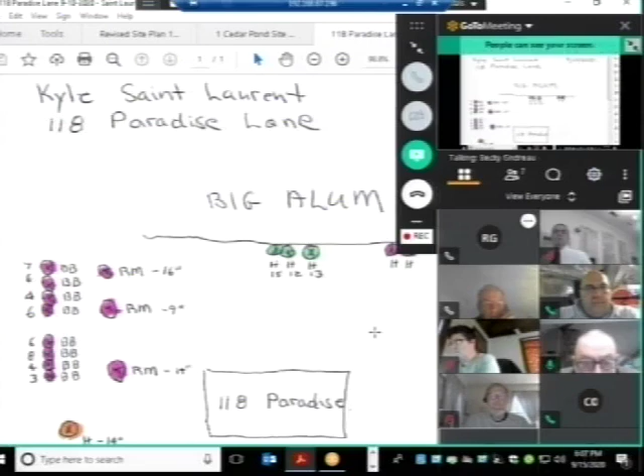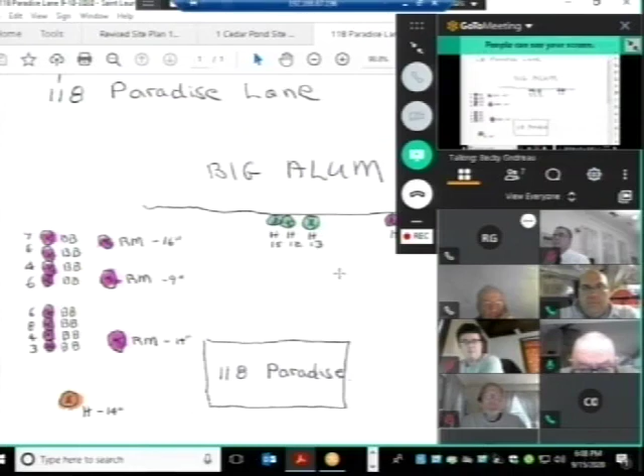All right, so here's the sketch that was drawn up. Purple indicates removal, and the green here is for staying. Let me just scroll down because I can't see it on mine. And the pinkish color is a hemlock staying. The only thing he forgot to include on here — that's actually 13 trees — is if you can see where my cursor is, there were 2 dead trees, I believe they might have been oaks, I'm not sure, in the front of the house that he just forgot to include, so the property owner asked those be included on here.

So I have no concerns based off of our review of the condition of those on the site, and with the arborist assessment. I'd recommend the approval of the removal of the 15 trees, and the treating of the 3 hemlocks by the shore. They also did include replacements, 2 river birch by the shore for the 2 removed by the shore. That's all.

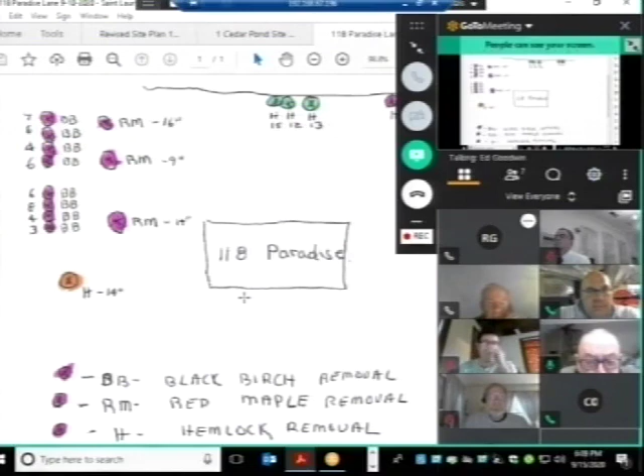Okay. Discussion. Eric? No, I was on site. As long as they're keeping those hemlocks, are those the only 2 plantings that they're putting in, Becky? Just the 2 river birches? By the lake shore, correct. Yeah, okay.

I have 2 questions. Go ahead. My first question: are the 2 river birches going to be one root ball with 2 river birches in it, or are they going to be 2 separate river birches? I don't recollect that it's specified.

We never suggest — I think we should make them 2 clumps, David. Well, that is 2 clumps of river birch. My typical feeling has been that one individual river birch does not do nearly as well as a pair because of their spindly nature as they get older. So oftentimes, like the ones in my yard, they had to be tied together in order to give them enough strength to continue growing.

My second question is, why is there such a disparity between the number of cuttings and the number of plantings? I don't understand agreeing to take down well over a dozen trees, not having any of those replaced. Let me see if I can give you an answer.

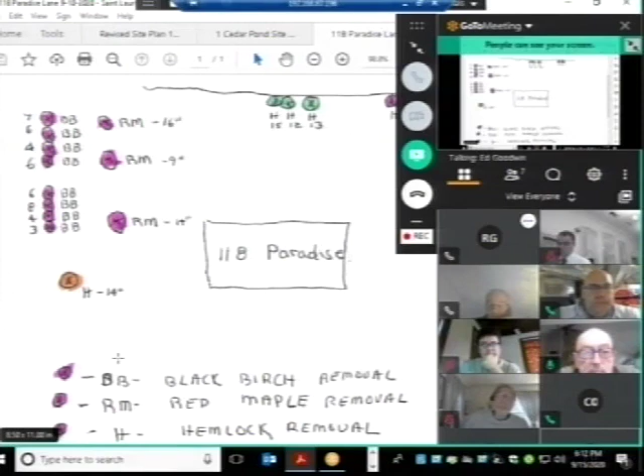It's not like — so the issue that they were bringing to our attention was along the house, as you face the water, to the left. There were a number of trees that were, I don't know what state you want to call them in, hanging over the neighbor's house. Most of them were in the 8 to 12 inch diameter range, and they were asking that they take those out because one had already gone down on the porch of the neighbor, and they all looked like they were going to be a problem going forward.

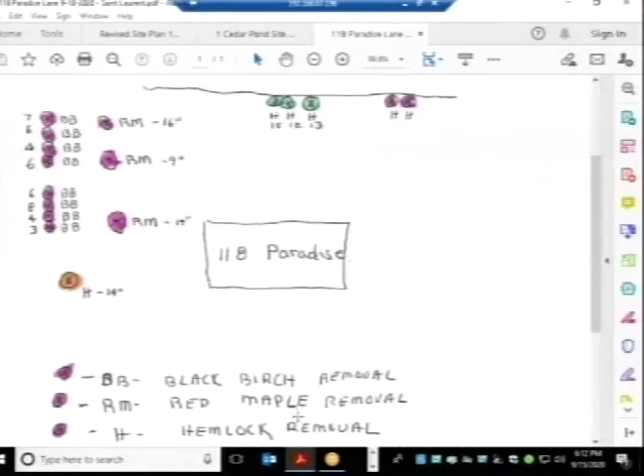So there were other trees there. They weren't cleaning the trees out, I felt, and to the front left of the property along the lake, we had asked them to leave a complete berm, and that's not on your diagram, but that berm of trees and bushes, etc., was untouched. So I don't know, Steve, you want to give them a measure of it? You were there.

Yeah, I mean, you're right, Dave. When you take a look at it on the surface, it does appear that we're not doing enough plantings. I mean, they were amenable to do anything that we asked.

I think what's been described is the way I saw it. Also, like I say, they said they would do anything that we asked. A lot of those trees weren't necessarily ones that looked like they needed to come down or were going to fall on somebody's house. I don't know, I thought the plan was fine.

Eric, you were there, what do you think? Yeah, it wasn't like they were clear cutting all the trees out of there. The only concern I would have is any precedent it might set, or people coming back at us, but I don't know that really comes into play in this case. It's not going to hurt the canopy for the lake, where we're talking about them being cut. They are leaning towards the other person's property, and they were very amenable to saving the hemlocks right near the resource area. So, I don't have a personal problem with it as it stands, overall.

Is Lenny on board? Yes, I'm on board. Hi Lenny. Anthony, how you doing? Good evening. Good evening to you too.

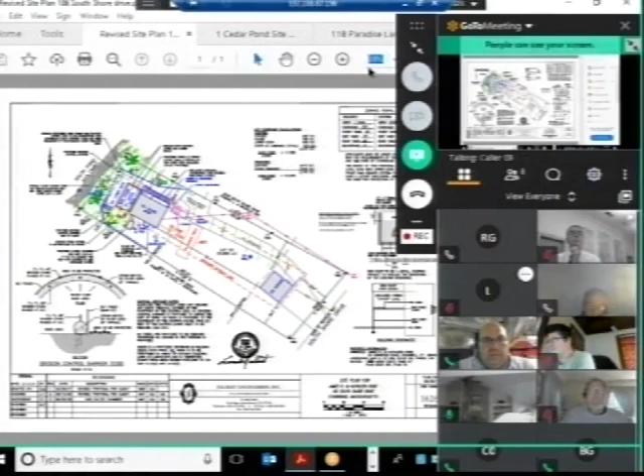What this actually is, it's work that's only taken place on the westerly portion of the cottage itself. The actual deck that's on the property presently is only 21.7 feet from the water to the deck itself. What we're actually doing is we're taking off roughly 9 foot of the deck, which is on the most westerly side, and leaving that as open space. And the new deck we're putting on is a 16 by 28, which is a two-story deck - the upper deck would be 16 by 28, and the lower deck is actually 16 by 20. It would have a membrane roof on the lower deck, which would be running off and draining to a Cultec located on the southerly side of the house, adjacent to the property line on that side.

The work being done on the deck itself is that the whole deck will be completely removed and rebuilt - it needs repair. Also the stairwell, located on the southerly side of the deck, immediately adjacent to it, that stairwell and the stairs would be replaced with new lumber in that area, but the rest of the stairs leading from there to the water would not be touched nor replaced. It would stay as is. It'd be fine.

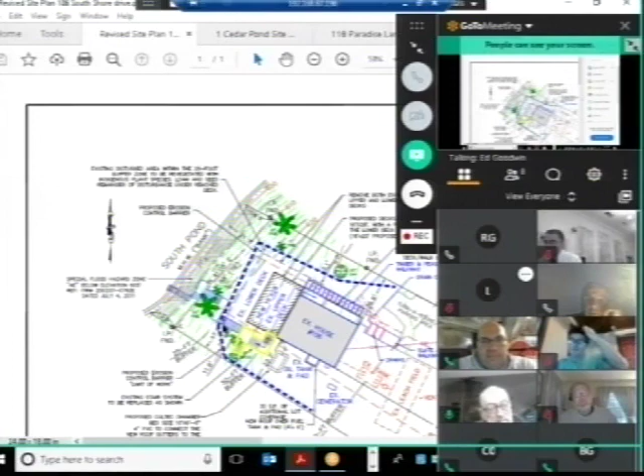I have a concern. When, as a committee, we're quick to allow a deck, and then we're going to go deck to house, or a screened-in porch and then a house. I mean, that's a functional way of... Then they're going to come back next year and ask you if they could put a deck off the front. This is a hyperbole, I realize, but I think it's something that the committee has to be aware of as you move forward.

By the way, for members of the committee that haven't been on that long, what you should now recognize is that was our chairperson speaking in his normal cynical way. That's not cynical, that's experience.

We've seen that. Well, if I may, Mr. Chairman, our issues generally of that process have to do with impervious surface and water runoff, and that's essentially reduced.

Has it? I didn't see the site. So that this deck...

Was not impervious. You're saying that the deck that exists today was not impervious? No, it's got spaces between the boards. So it's a pervious surface, and you're going to have a 28 by whatever impervious section with a roof on it. How's that an improvement?

I think Lenny clarified for me in the office when we spoke about this, and maybe you can clarify that too, Lenny. You're saying that there's no roof structure going over the upper deck, it's just a membrane that goes underneath the deck, and that's what will drain to the Cultec unit. Is that correct?

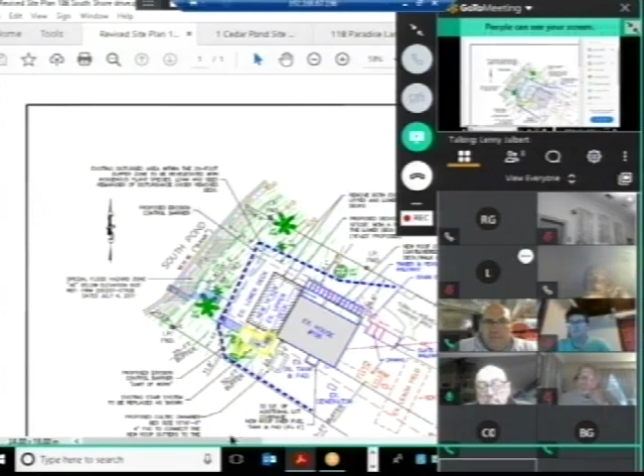The runoff on that roof is exempt from the Wetlands Protection Act in that it does not create any hardship or pollutants relative to runoff, and I think it's a win-win situation.

Just looking at the plan to clarify, the roof—if you can see where my cursor is—the new roof overhang will go over the walkway on the side of the house, if you can see that. That one, yeah, that's just a shed roof for the walkway, that's all it is. It's going right back into the area.

I think that's where the confusion of the roof came in, is right, what I was trying to get at.

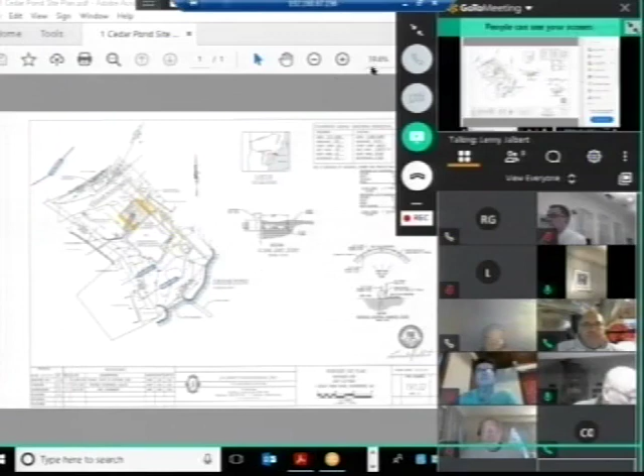Lenny, you're on. Yes, good evening again. We're on to the property located at 1 Cedar Pond Road. Basically, what is actually going to take place there is putting on a 24 by 24 foot attached garage, which is located westward from the lake and is actually buffered from the existing structure that's there now.

In the process of doing this, what we actually have is there's a shed located on the portion of the site, which is on the side of Cedar Pond Road. That trailer. Yeah, but we have an interference problem.

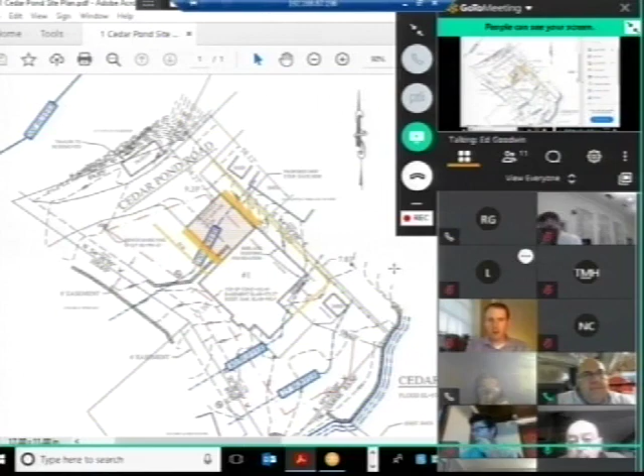Public comment. Do we have public? Jeff? Good evening. Does anyone want to speak to the application for 1 Cedar Pond Road? No public comment.

All right, do I have a motion to close the public hearing? Steve Halterman: Yeah, I move to close the public hearing. Eric Gaspar seconds. I'm sorry, Steve, no, I'll second it. Hey, next time.

Do I have a second? I'll second it. Steve Halterman seconds.

All right, discussion? All in favor of closing the public hearing? I'll start with Eric because he feels it's slighted. Go ahead, Eric. Eric Gaspar in favor.

Stephen Chidester in favor. David Barnacle in favor. Steve Halterman in favor. And Ed Goodwin in favor. Do I have a motion?

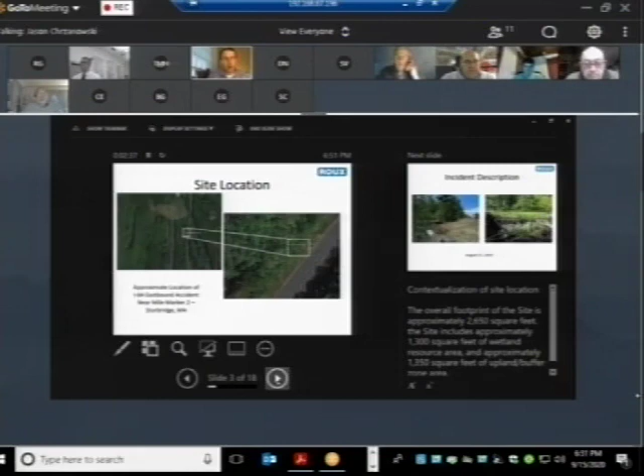So just walk through here. I think we've covered some of the incident locations near mile marker 2 on 84 eastbound.

This photo is from the day of the accident. You can see the excavator down in the wetlands. Tricky access to get in there for sure.

Some of the conditions - this is the wetland area where the truck went, and this area down here is where we've been working. It was mostly muck and wetland material, which we pulled out, and then we started working up slope. We're now more focused on this area up on the slope, just to finish some of our cleanup work and then restore the resource area.

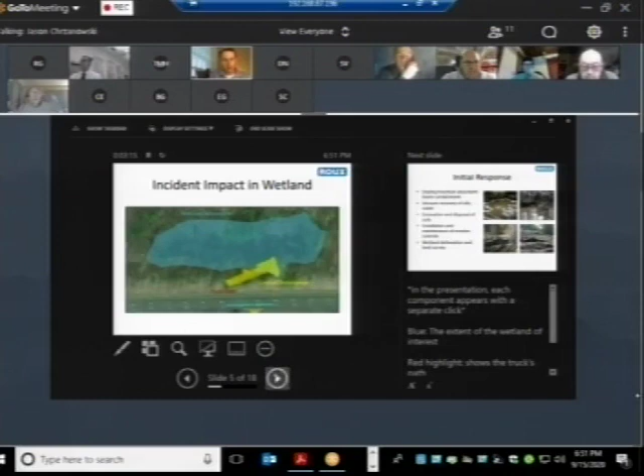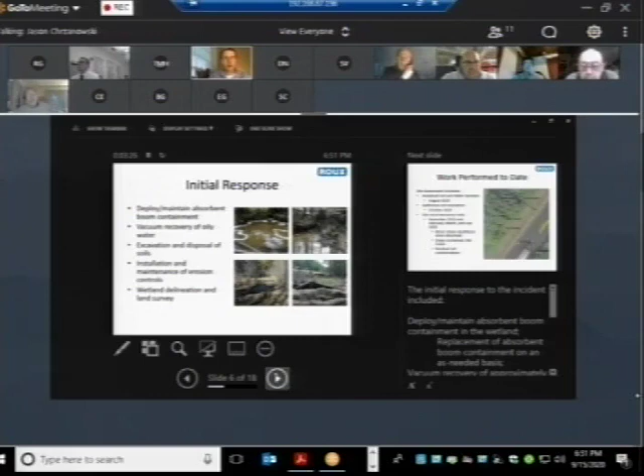Here's some of the boom containment from the day of the incident, which we've changed and maintained over time. We set up erosion control - silt fence, hay bales, things like that.

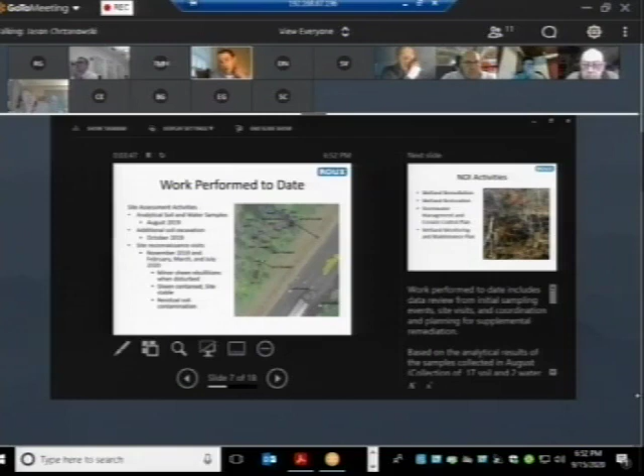This is some of our sampling and analysis. We've tested roughly 18 samples. A lot of them are clean. There's a couple right on the edge that we're going to focus our next round on, and we'll do more testing as we clean it up.

The NOI is basically to do additional cleanup. We'll do soil samplings to confirm we've reached our cleanup goals with Mass DEP, and then we'll stabilize the site.

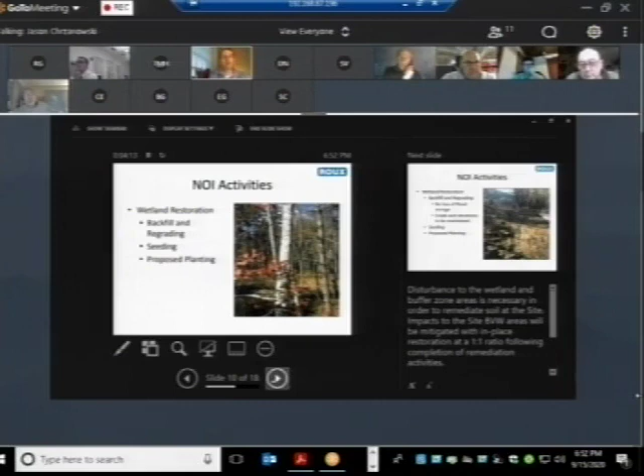Pending this hearing and the outcome, we'll look to start work pretty quickly. We'll probably stabilize the site this fall and be looking to do the plantings in the springtime. It is Mass DOT property, so we have to do an access agreement with them.

Application and permit - we don't expect too many hurdles with that. They just asked what the result is going to be when we put it back together. We've surveyed out here and we're going to restore the area and the grades to make it like it once was, so there shouldn't be any loss of flood control.

In the NOI application, we have a seeding and planting plan to put soil back in, and some native plants. We also have jute mats for erosion control to go in as well.

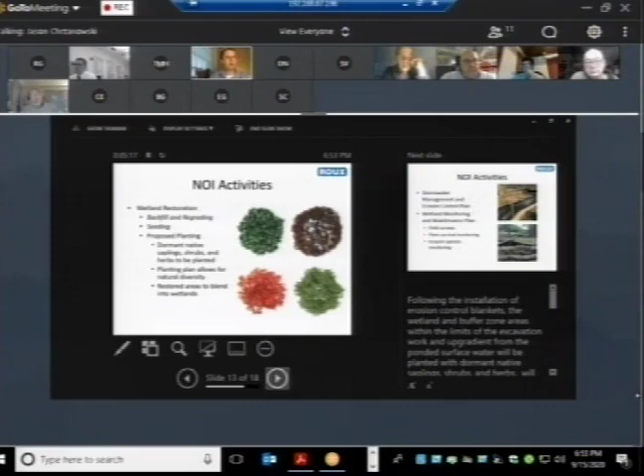The NOI itself details the types of trees - I'm not going to speak to the trees specifically, but we'll put them back in, and we'll maintain our erosion controls out here like we have.

This is our anticipated schedule - pending the hearing, we'll look to engage someone like Clean Harbors, most likely come out and do the work this fall, stabilize the site, then keep an eye on and monitor to make sure conditions are stable, and be looking in the spring to put it back together. This is our contact information should you need it.

So with that, if anybody has any specific questions you want to delve into, I'll open it up.

David asked: one question - what percentage, approximately, of the 100 tons of material you took away came from within the pond?

I would say probably at least 75%. When we arrived on site after the accident, Mass DEP was out there first. Clearly, they had to pull the wreckage out and start work. The excavator was already in there, and it wasn't entirely surface water - it was mostly muck, with some water right at the surface. As we started pulling that muck back, clearly it's a wetland, so the pond kind of formed. But I would say what we pulled out was probably roughly 75% of the tonnage right now. Thank you.

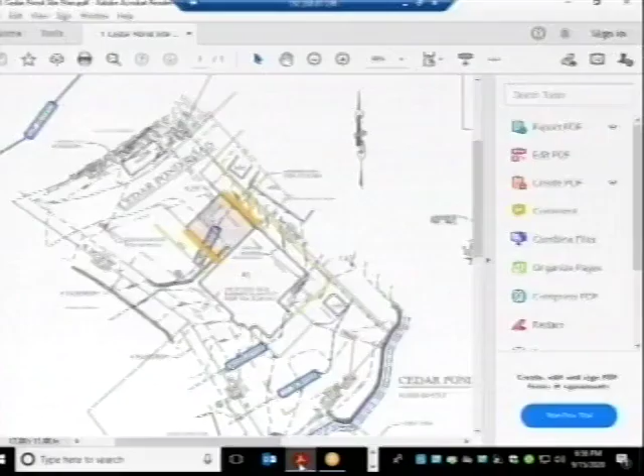There's some individual compounds specific to fuel that are just above threshold. One of the concentrations has a level of 4, and we're at about 4.4.

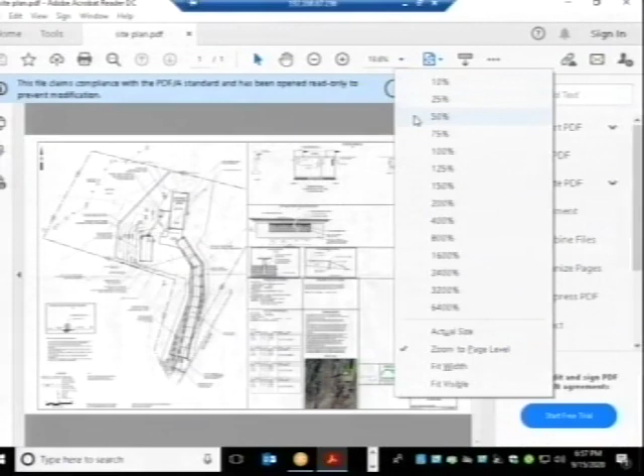In addition to the soil, there are also issues we have to address besides soil concentrations to make the case for a permanent solution with Mass DEP. Some of that has to do with stability.

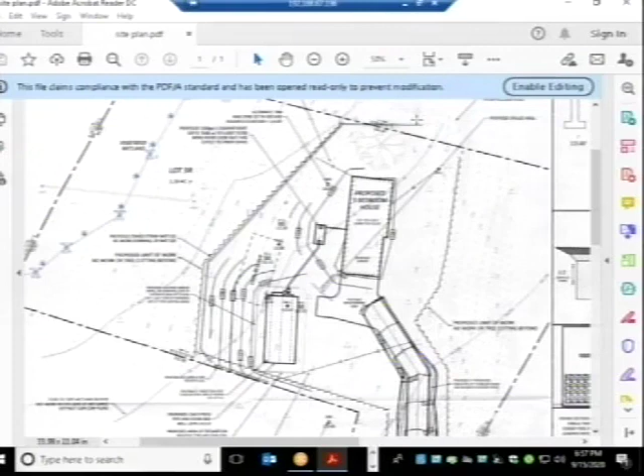When you have those levels, there's a little bit of odor, so we run a field meter on it. Even though the soil is testing not too egregious, it's a sensitive area, so we don't want any sheen showing up in the wetland after we restore it. That's why we've maintained the booms out there.

So there's a couple of goals—not only the soil concentration, but the longer term question of whether those trace levels, even if at or below a regulatory threshold, could generate a sheen. That's something we want to avoid after putting the wetland back together.

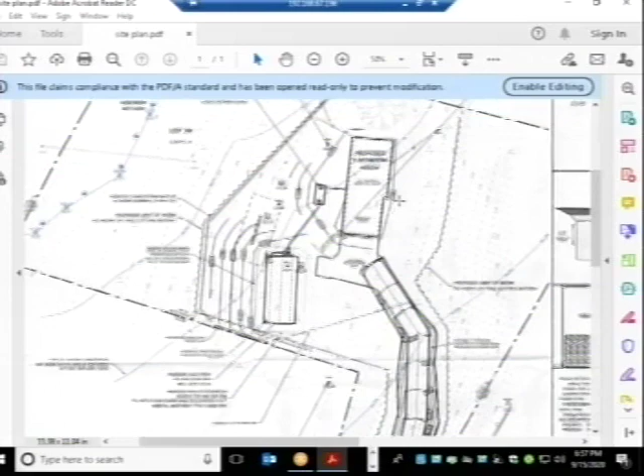The other aspect we're required to address in the MCP, per regulatory guidance, is we have to make an argument about whether it's feasible to achieve or approach background conditions—basically, what the site would be in the absence of our spill. Granted, it's the side of a highway with some roadway runoff, so it's not zero.

Given the wetland's accessibility, working on that slope coming uphill is a challenge, but in the scheme of things it's pretty feasible to do a little more work to make sure we're cleaning the site up to meet the standard of care in the MCP.

And your second question? Well, it has to do with timing. Yeah, that was one—it happened a year ago. You went in there with an emergency approval from us, and of course the state was already there.

I don't get why this thing is still going on. I mean, obviously you don't have to go to zero as far as concentrations, and I'm confused by this whole thing. I've done this kind of work myself, and I've never done anything quite like this. It's drawn out, and I'm not trying to be negative, but I don't get it. Could you walk me through why we're doing restoration a year after the event happened?

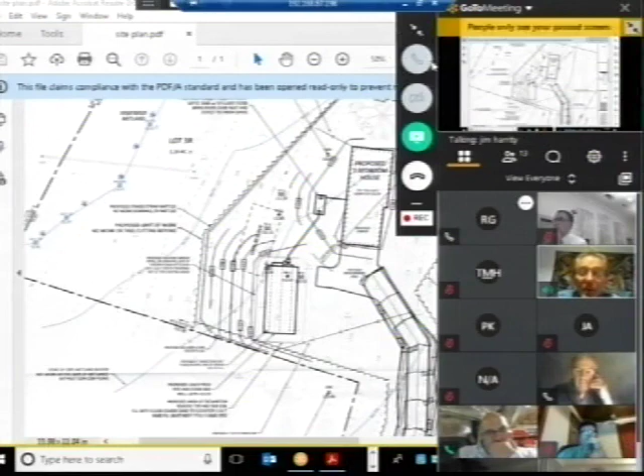So as you can see, it's a single family that's down the hill a little bit, and it's a 3-bedroom septic design located behind the house, and looks pretty straightforward. The only thing is...

Becky, do you want to talk about the stormwater requirements? Yeah, so this is the third lot that we're seeing from this property. We did review 2 previous ones, individual single-family houses last year. With this filing, we did see that there's 5 lots proposed here. So anything over a 4-lot subdivision does trigger the Massachusetts stormwater standards. There was some discussion about maybe doing 4 lots instead of 5. The property owner has considered that and he'd like to move forward with the 5. So they do need to submit the stormwater checklist and drainage analysis for this property, as well as discuss how to address the 2 properties that have been constructed at this point, but their permits aren't closed out too. So that's kind of outstanding at this time.

So Jim did want to come on to the meeting. When this came in, I did note that we didn't go out for a site visit at this time. It's my understanding they'll be working on addressing the stormwater for these properties. So if he's going to be asking, I was recommending a continuation to our next meeting. That would give them time to submit those materials, and then we can go out and do a site visit to this property too.

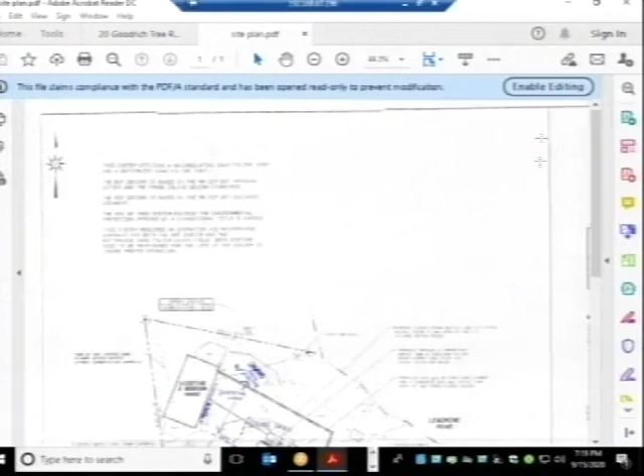Becky, you went out there. You want to? Yep, I'm just trying to pull up the site plan so I can give a general overview, and if there's anything, Tim and Mary, that you want to add, feel free to add in. So let me just share my screen. Okay, all right, so this is the site plan.

So this is a property on Lead Mine Pond, existing two-bedroom house here. There is an existing driveway which goes down a slope. We did do a site visit out here last Thursday. It is a paved driveway in pretty poor condition. Their goal is to repave the driveway. They will be adding a riprap swale along the side, which will help pick up anything coming off the hillside. And then they do have an existing parking area down here.

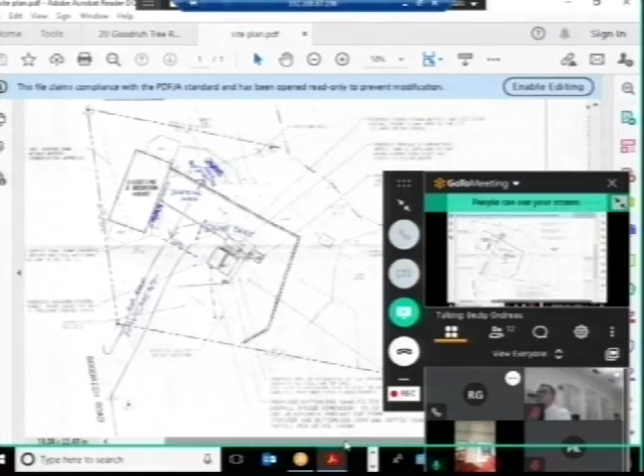And one of the other things too is just the tree removal that occurred on site. So the property owners - I'm just going to pull up the second plan, which has got the trees on it - did hire a contractor to come out and do some limbing and removal of a couple of either hemlock or pine trees on the property. The contractor informed the property owners that permits weren't required, so they thought they were all set. I did receive notification that work was occurring out there, so I stopped at the property, met with the contractor and the property owner at the time, and went over that. At that time, they were done with the limbing of the trees, and it was just removal of 3 smaller pine or hemlock trees.

I did talk to them about the requirements for it, and they're aware of that now. They immediately addressed my concerns and submitted the RDA and an after-the-fact tree removal, which we included as one application. When I was out there, I made a recommendation because there are a lot of trees in the area, and because of the canopy removals you typically look for some type of replacement.

There was one area where I thought some shrub plantings, right in this general area, would be a good addition to the property. They included the removal of the 3 hemlock trees noted here, and they are replacing and adding 4 high bush blueberries.

So with the driveway and the after-the-fact removal of the trees, I don't have any concerns. I'd definitely recommend including the replacements they've offered to do as a condition for that.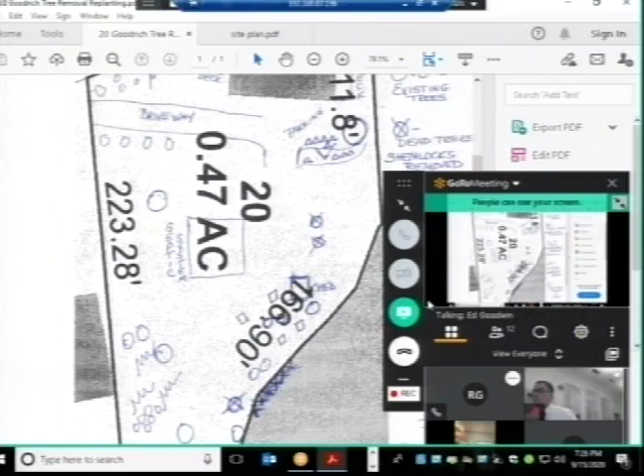Thank you, Jeff. Do I have a motion to close the public hearing? So moved, Steve Alderman. Second, Eric Gaspar. All right, discussion? Seeing none, all in favor?

Eric Gaspar, in favor. Stephen Chidester, in favor. David Barnacle, in favor. Steve Halderman, in favor. And Ed Goodwin, in favor. Closing the hearing. Okay, do I have a motion?

I'll make a motion that we approve the requested determination of applicability for 20 Goodrich, which includes the driveway repaving project and the already completed tree removal. Do I have a second?

Steve, you're not looking at your computer. I was pointing at you. Eric Gaspar, second. Okay, sorry, I missed that.

Discussion. I have a quick question about the erosion control - I know it's just going to take one day, but you might just, for safety's sake, ask that the contractor has some erosion control material, a wattle would do, on the site.

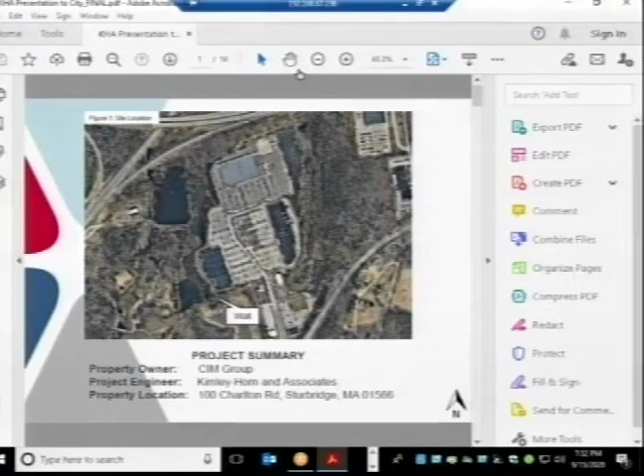No, Philip, you can't take one meeting and figure something like that out. Oh, fair. Okay. I can assure you there are times we're way off. Gotcha. Okay, well, that makes me feel better.

Yeah, we can go through these first. We repeated a lot of slides. We did add a little bit more additional information based on some comments and questions. So again, here's kind of the overview of the project location. Go ahead and move to the next one, Becky.

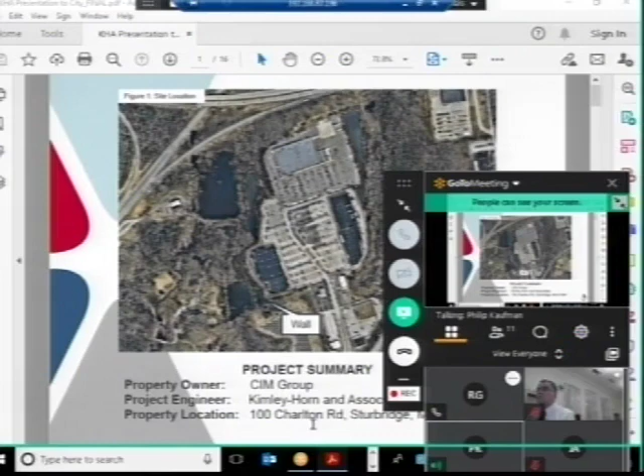Again, where the wall sits, just some of the spacing. I think we talked about this in detail last time, just how there is obviously a pretty limited buffer from the existing wall to the wetlands. Go ahead.

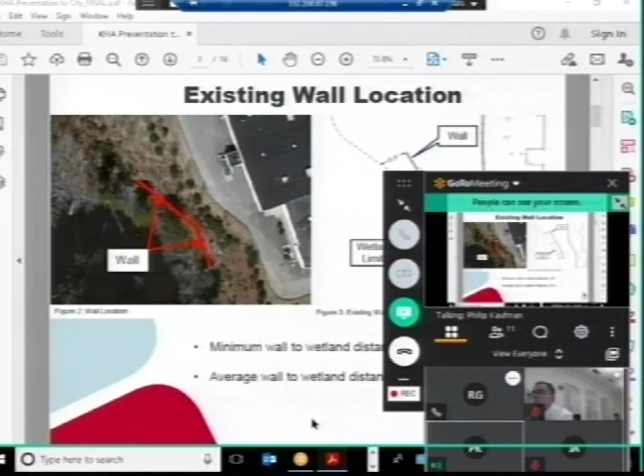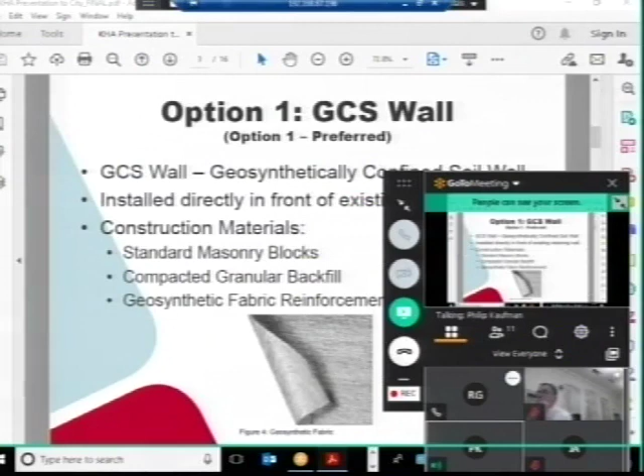The option that we presented last time, which remains our preferred option, is the geosynthetically confined soil wall. You can skip ahead to the next slide. This is, of course, not changed.

What we found was that even after our proposed wall, which would be 10 feet in front of the existing wall, we would have a minimum of - these numbers are a little bit misleading because we're adding 5 feet for construction activities. So there would be 8 feet from the new wall to the wetland.

During construction, we estimate we would be 5 feet. So you'll see the first bullet, the minimum space during construction would be 3 feet, and that would be at the absolute pinch point. The average would be 8.5 feet during construction, and after construction it would be 5 feet greater, at 13.5 feet from the new location of the face of the wall to the wetland that was delineated by our biologist just a couple weeks ago.

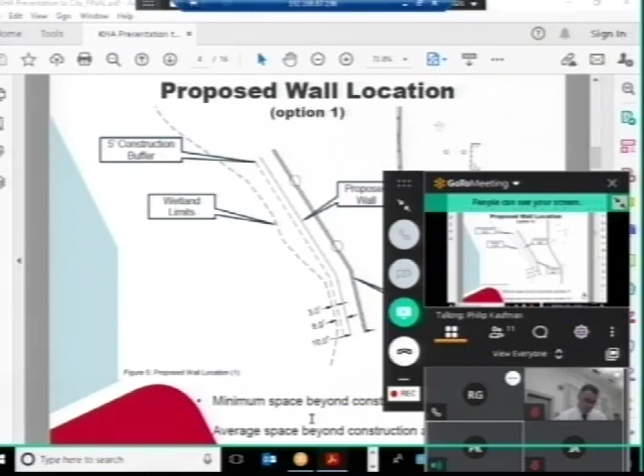So you want to skip ahead to the next one? So again, we showed you this last week, but we would be putting this wall 10 feet in front of the existing wall, and we'd be filling in with backfill the space in between. So that's the design concept here, if you want to skip ahead, Becky.

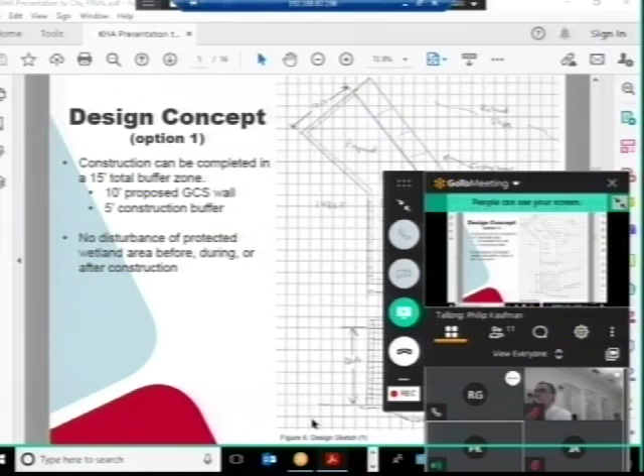So one of the questions that came up last meeting was specifically about clearing and kind of what we thought that might look like for this option and the alternate option we have here. One of the major advantages is that the construction is really confined much to the space. And I know we showed you photos - we'll look at that again here in just a minute from two weeks ago.

But we're working on the top end of the new wall, so most of the actual construction activities are in the 10 feet between the existing wall and the new wall. So really the area that we need for construction activities would be the 10 feet for the new wall and about 5 feet beyond that, so a total of 15 feet. We would need to clear all the way from the gravel private road, and we would clear a path that gets us down to the bottom of the wall.

So here's our estimate. We went 5 feet beyond the back. If you look at the very top, we have a little dimension that says 5 feet. But we think the total clearing is about 521 square yards of space. If you go ahead, Becky.

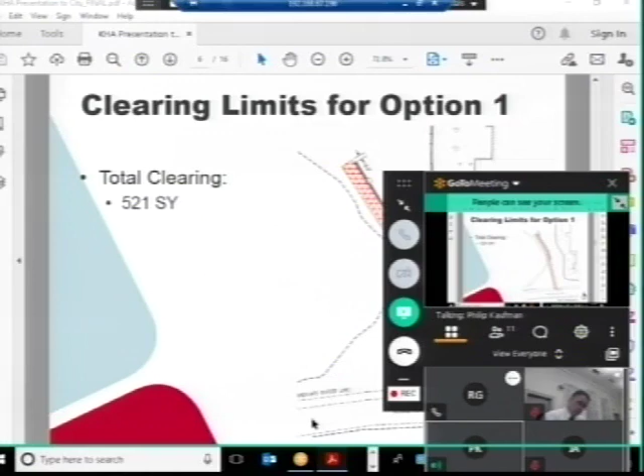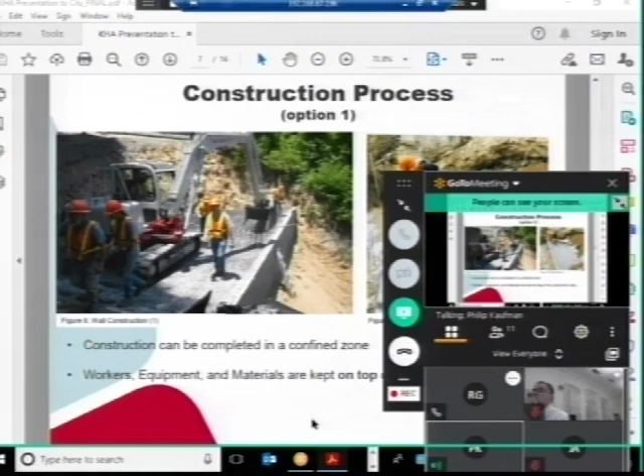And then here are the photos in the next slide that, again, just kind of show you some real photos of the action, right, of an install, where you can see the construction equipment and all of the construction really happening in that confined space between the two walls. So as soon as that wall starts getting built, we're trying to minimize - there shouldn't be any more than just a couple feet of impact from the new wall location to the wetlands. Once we get going, most of the activities happen within that 10 feet between and not on the wetland side of the new wall. Skip ahead.

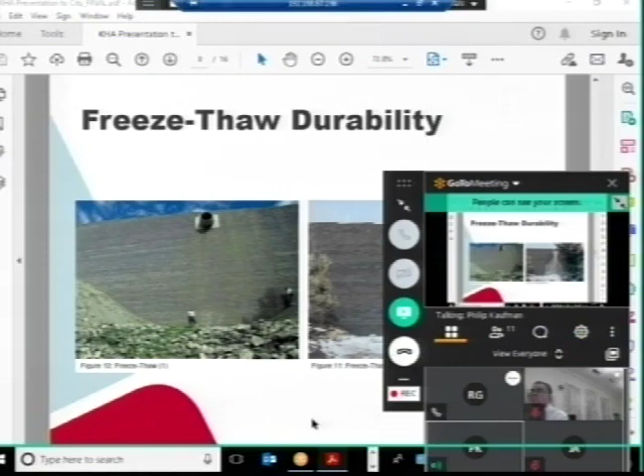I'm going to let Justin talk about the next two slides, again as it relates to some of the questions that we wanted to try to address from two weeks ago on the freeze-thaw, and then the next slide about the water kind of surrounding as the wetlands potentially move or expand moving forward. Justin, do you want to take over for these two?

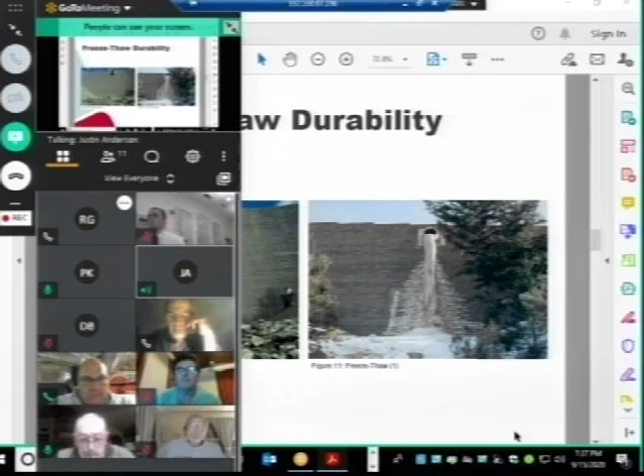The figure 10 on the left is really intended to show the height to which these walls can be constructed. You can see our founder there in the bottom for scale. And then I think the question was raised last week about the durability of the blocks to freeze thaw, so we presented the same photo on the right in the winter to visually demonstrate the repeated freeze-thaw cycles that they can endure.

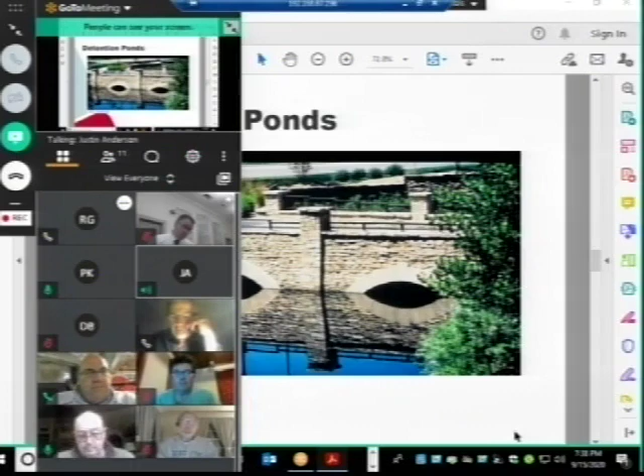Justin, your wife got you taking care of the kids tonight, or what's the story there? Yeah, I don't know what's happening in there, but it's... okay, I'm just kidding.

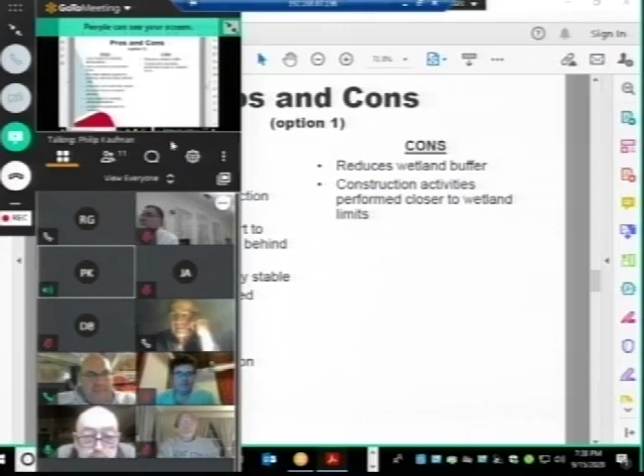Great, thank you, Justin. So here's kind of the pros and cons as we see for the wall here. It's less impact to landscaping - that will make more sense when we show you the second option, but the impact is really just a 15-foot trail from the existing gravel trail through to the wall and across the face of the existing wall. More confined construction zone, as those photos showed, compared to option 2. It provides lateral support to the existing wall and the slope behind it, so that new wall is taking all of the pressure and support of everything behind it - internally and externally stable.

I do want to apologize - afterwards Becky and I had some emails back and forth with Mark, the owner, and I think I confused everybody on how I used the term failure. I want to clarify, and we shared the report that Kimley-Horn prepared in 2017. We believe there are localized failures only, not a global stability issue or any major structural wall concerns. What we believe has been happening is very localized failures where the soil or gravel underneath these large rocks has been washed away with time, and the top layer of rocks has less resistance as the sand and soil underneath wash away, so those rocks have been sliding and falling off the top. I apologize, I think I was unintentionally confusing on the last call, but we believe there are only very localized failures.

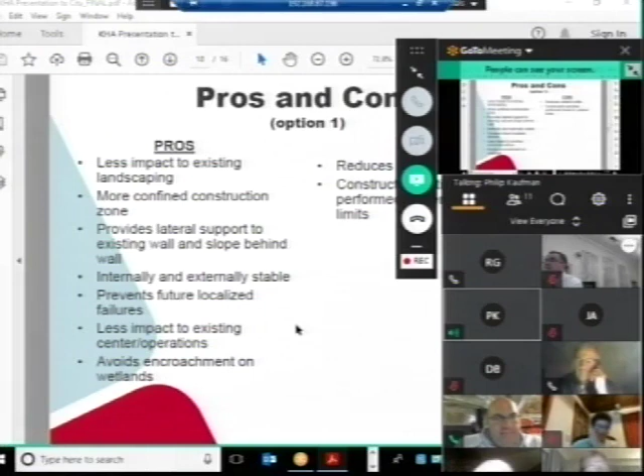Okay, so let's jump to the next one and talk about option 2, which is our soil nail wall. This is where we're actually going to be doing a series of walls where we eliminate the top half of the existing wall and grade back. Let's jump to the next one here.

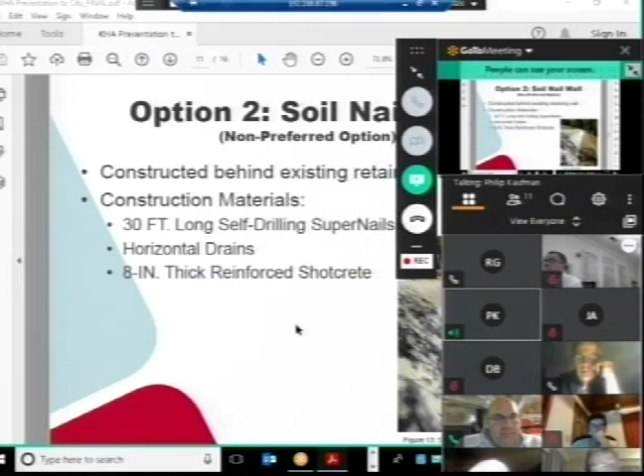This is tough to see in this 2D plan view, but essentially where the existing wall exists today, we're going to eliminate the top half of that wall, and grade back, and basically put a second wall up where you see the proposed wall, which is going to be much closer to the center itself. If you skip ahead to the sketch, I think it will help.

Here's the sketch where on the left you can see the hand sketch where we point to the existing wall. We're removing the top portion and grading back at 2.5 to 1. Then where you see it start getting more vertical, the proposed wall, that's going to be concrete, essentially shotcrete, vertical. I think we've got some photos.

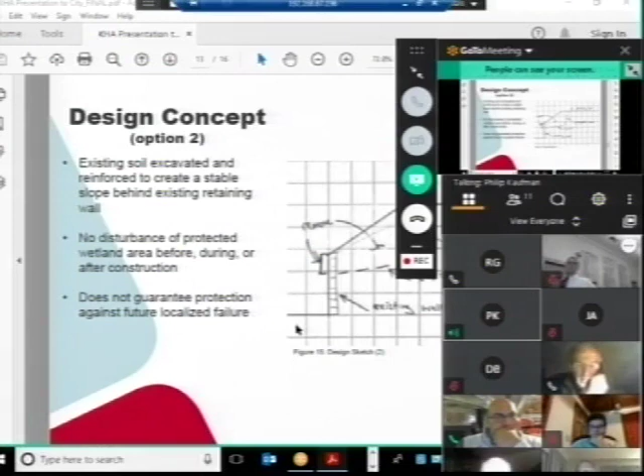There was a good one on the cover sheet for option 2. We're going to install a new wall, so it will essentially be a series of walls much closer to the parking lot. This is kind of the design concept for option 2.

So the clearing for this one, it's a little bit unfortunate that in order for us to do so, we're going to be doing 2 things. We're going to be installing the new series of walls, and to do so, all of the clearing is going to have to happen on the top end of the wall. That's the big chunk of crosshatch at the top end.

The reason why we continue that 15-foot stretch on the bottom is because a couple of the blocks have fallen, which led to the discussions today. We talked to GSI about whether there's any way we can mobilize equipment on the top end of the wall and reach over to pick up those blocks. But in order for us to truly get those out of there, we're going to still have to get equipment down to the bottom of the wall. So we're kind of double counting that 15 foot. That is still going to need to be cleared, same as option 1 and option 2.

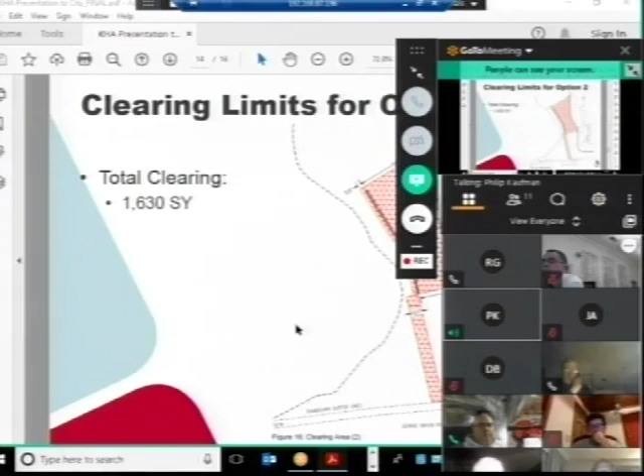But option 2 also has all of the clearing on the top end. So as opposed to the 500 some in option 1, we've got 1,600 square yards in option 2. Go ahead, Becky.

So here are some photos. If you look at the top right, figure 19, that one does a good job. I think you can kind of see that shotcrete, that edge where that wall is going to be a concrete edge.

The bottom left kind of shows them blowing in and installing the shotcrete in that wall construction. But what I also like about maybe the top left and the bottom right is that the majority, or a lot more, of the work is going to be able to be done on the top end.

So what's going to happen is we're going to start at the top, actually utilizing the center and the pavement, the rear service drive for the tenants. And we're going to have the equipment with the excavator, with the arm reaching over and starting to excavate.

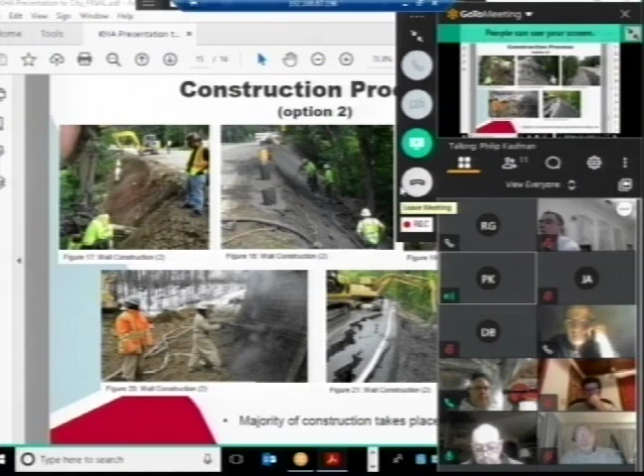Now, as we excavate, we're going to end up having to create a road or path, and we're going to have to bench. So all of the construction is not going to be able to be done at the top. We're going to have to utilize that space that will be between the two walls. But the point is, all of the construction will be on the top end of the existing wall.

And so that space in between, which is landscaping today, where we are clearing, will be basically creating paths and benching level areas for the equipment to sit as we excavate out for the new wall series. Next slide here, we're about done.

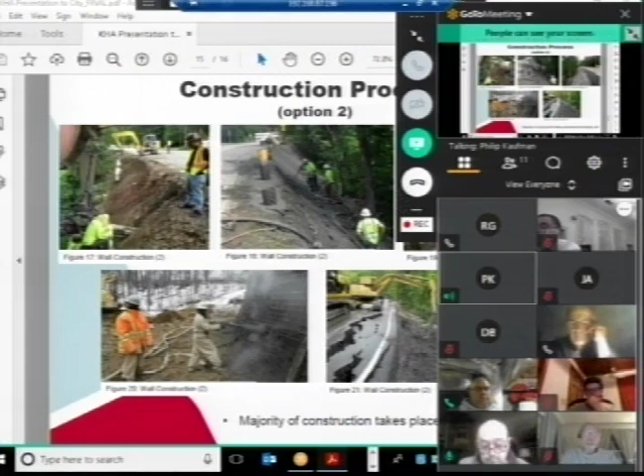And so this is the last slide, which is the pros and cons. The pros of option 2 really is that the majority of the work takes place behind the existing wall. So rolling right into the next bullet, it really doesn't impact the wetland, or has less likelihood of impacting the wetland. This also doesn't reduce the existing buffer that's there today.

And it stabilizes—in addition to the series, what I didn't mention is that part of this design option is we're installing soil nails at the top part. So we're stabilizing the soil above with those nails as well.

The cons: greater impact to the landscaping, right? So we saw the 1,600 square yards versus 500. It's a lot greater impact to the existing center during construction. We're actually going to have to utilize a lot of that rear service drive, utilizing traffic control and interrupting deliveries. The other thing is it does not stabilize the existing retaining wall, so today we're seeing the localized failures and the top blocks falling off.

While this minimizes and reduces the height of the wall, the reality is half of the wall is still going to be the exact wall and type of wall that exists today. So it might not be 1 year, 3 years, but 5, 10, 20 years, at some point we still run the risk of localized failures of the soil underneath that top layer washing out and those top blocks still falling. So when we think about the root cause here, we're not entirely sure that option 2 solves the problem we're trying to solve.

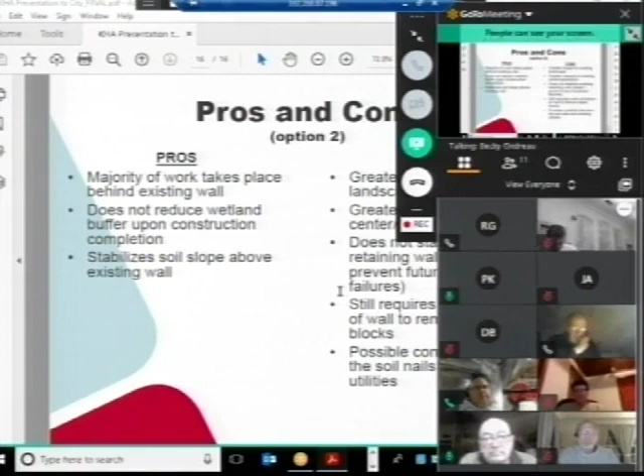That was a good presentation. Thank you for putting that together. One question: do you need to have a pipe like this in your wall, or how are you going to deal with water behind the wall?

Yeah, Justin, I think when we talked we were planning on just doing a weep hole, so I don't anticipate... but Justin, do you want to confirm I'm correct there? So the backfill in the wall should be pretty free draining, it'll be the crushed stone backfill, so it should drain pretty freely. If you had a surface water runoff concern, we could include a pipe like the one in the photo, which was the reason for that one - it had a parking area up there with an inlet to drain through that culvert. So that was a surface water condition, but for groundwater flow I think we should be sufficient with the porosity of the backfill and the GCS.

Okay, I figured that pipe was not related to your wall, but I wanted to ask to clarify that. So yeah, thank you for putting the presentation together.

I think it did clarify my main question going into this, because you sent me this last night, so I looked at it a little bit today and reviewed the geotechnical report. Phil kind of clarified at the end here, but my main question was: if it's just the boulders on top that are causing the failure, and it's just the top of the wall that's thought to fail - some has failed and some will fail - then why not look at options of just getting the boulders and the large trees up there? I think the geotechnical report said the large trees up there were probably adding to that as well. What's the option of going in from behind and removing that material and replacing it with a better fill that's more suitable for there? Phil mentioned at the end that you don't know about the rest of the material underneath that it could continue to erode through the wall, so maybe that's a concern, but it would seem that if it's just the boulders on top and that material, why not just address that and avoid the need for the big wall in the front? That was my main question going into this.

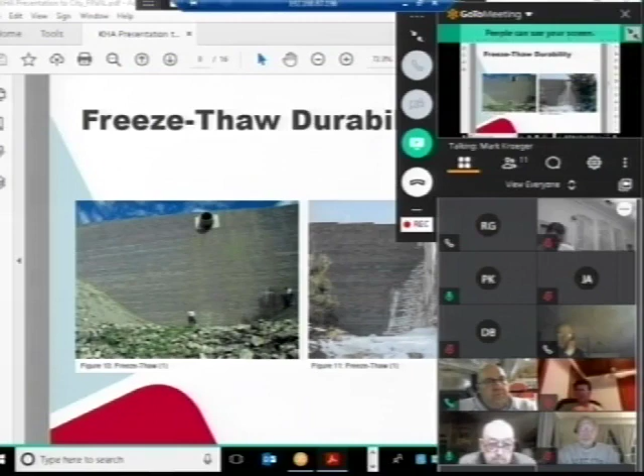This is Mark - a couple other things too. You can see in some of the boring logs that in some locations the drill only went down about 9 feet or so before hitting some pretty large boulders. So there was still quite a bit of unknown as far as the true full depth of the existing backfill.

As Phil was starting to get into, the thought to remove the boulders and replace the backfill with suitable material would basically have involved trying to rebuild the entire wall, which would then require shoring, and based on the composition of the existing soils and slopes, it would have to be benched. We couldn't get the slope that's there now - it would have to be a lot steeper, causing us to go all the way back into the building, rebuilding not just this wall but the entire slope, the pavement, and the utilities. We know for a fact there's a fire line just on the back side of this curb.

So all of that is impacted with there still being a lot of unknowns, along with the recommendation of PSI to touch base with a shoring contractor and specialty contractor. As Phil alluded, we got in touch with GSI, and after looking at everything, they said here are some options we could do without having to go back and rebuild the whole back of the site behind these buildings.

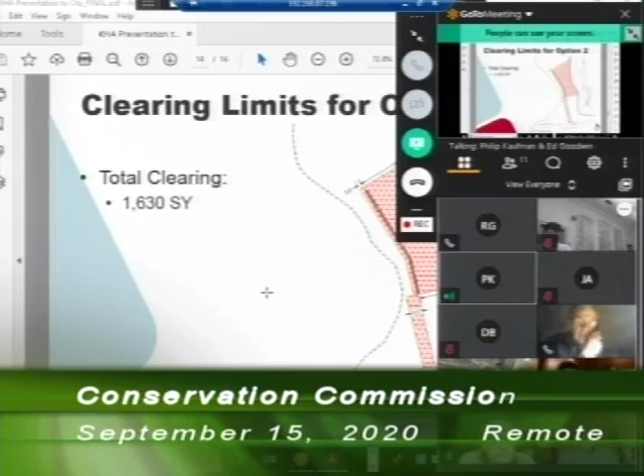So if that's an option, I was thinking the same thing. This is Ed Goodwin. I was thinking the same thing. I don't see any reason to haul the blocks out of there and clear the area. They can become a part of the environment.

That definitely would help, and that would eliminate the reason that we were showing that additional 15-foot path in Option 2.

The only other comment I'll make is, when we had our environmental engineer out there, he noted that the trees really are up along the wall. The wetlands themselves are actually pretty open, pretty clear. There's not a lot of shade for the actual wetland. Most of the trees and most of the shaded cover is in that area up against the bottom of the existing wall and in between that buffer.

So I think the point is that, in either option, one thing we would certainly be willing to do is work with the city on what that transition vegetation or restoration looks like, if it's replanting trees, if it's better upland type species.

He mentioned that he saw a couple things down there that concerned him, some invasive species. I'm looking at my notes because I'm not an environmental expert, but he saw some purple loosestrife, I think is what he called it. So that also provides us the opportunity to help clean some of that invasive stuff out and really work with the city to come up with whatever upland plants or trees we want to replant as a restoration within that area.

Yeah, the problem is that there are just some very mature trees there. As you say, they're providing pretty much the only shade that we have in that part of the wetland. So I'm very against clearing any of those mature trees.

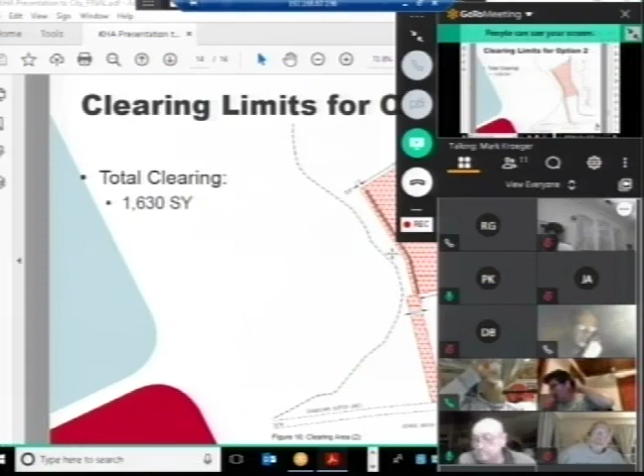Yeah, this is Mark again. It is kind of unfortunate in the sense that option 1, which encroaches on the wetlands the most, is really the only option that we know will solve the issue. The only other option, just to throw it out there, whether feasible or not, is to rebuild the whole wall and the whole slope. But the feasibility of that doesn't make it an option, because that means rebuilding utilities, asphalt, potentially getting into the building footings and structures, and a bigger site impact on the rest of the property.

Yeah, I mean, just to echo, we've been working with Becky for probably longer than Becky has enjoyed working with us. I know this is such a priority for everybody, and we really do want to find a way to make sure there's no future sedimentation and erosion control issues.

And man, I wish there was an easy button. All we can assure y'all of is that Mark has engaged Kimley-Horn. Kimley-Horn has said they can help, but it's even a little bit out of their specialty. We got PSI, a geotechnical company. We've gotten one of the most experienced specialty contractors, GSI. We've had a lot of great minds looking into this, and there's no option 3 that we're not sharing. These are literally the only 2 options that all of us could possibly come up with, and we didn't really like option 2, which is why it wasn't included in the presentation 2 weeks ago. But in fairness, and because of the comments that were brought up, we thought it only right to share the only other option that we have, which is these 2 options.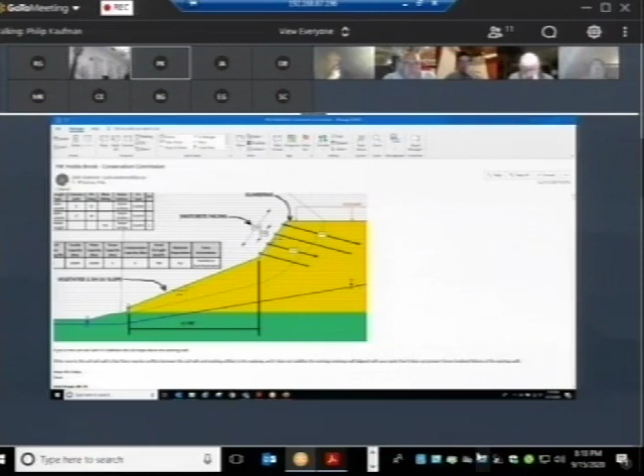And this is where the soil nail walls are going in. But our guardrail is basically right here, and our building is somewhere over here. So these nails are going back, impacting all of the area underneath the pavement, which is where the utility is, so that's one of our bigger concerns. The other bigger concern is just the bottom portion of the wall, it's the same wall, which could lead to the same type of localized failures in the bottom portion of it.

But as was stated, by removing all of that material, you're drastically reducing the amount of pressure being exerted on the wall you're leaving. Absolutely, to be clear, I don't expect an issue in 1 year, 3 years, 5 years, but again, to be clear, at 15 years, 20 years, my point is we would actually expect that over time, the continuous washing of those fines between them would likely lead to this.

Now, what does that mean? Is it 2 years, or is it 20 years? Is it 50 years? The point being that it's not solving the root issue, which we believe option 1 is.

Are you going to be excavating behind what's left of the existing wall and replacing some of that fill? Because I think really the heart of the problem is the fill that was used behind the existing wall. Like you said, it's boulders, so it's material that's moving around, and that's really what's pushing those blocks off. The blocks aren't just sliding off on their own; they're getting pushed by the heaving of the soil and material behind the wall.

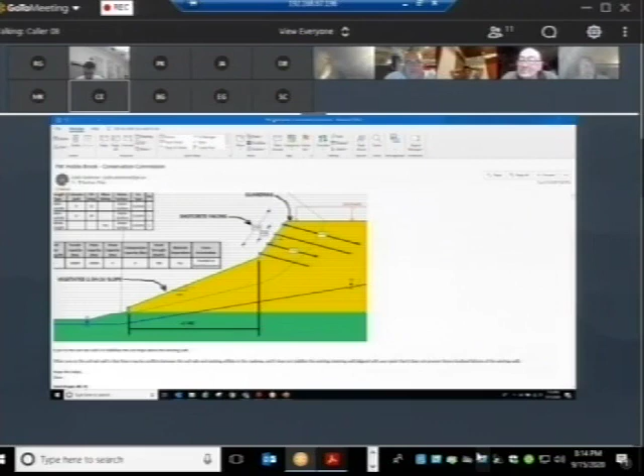Okay, I've got another question to ponder, if I may. How many stones or blocks, whatever we call those things, are you going to remove on option 2, how many rows, to shorten that wall? I think Ed asked this question and I don't think it was answered. Yeah, it's a good question. Honestly, I don't know that we have that answer right now. We haven't jumped to any real heavy design. Part of our objective was to gauge which option made sense. We can look into that, and I'd be happy to send that information to Becky, but I don't want to give you any wrong information right now. Okay, the reason I ask, let's say you remove a couple of rows, you're significantly going to lower that thing. What are you going to do with those stones? How are you going to get them out of there?

That would be in the area in between the two walls. As opposed to creating that path from the gravel road down to the bottom face of the wall, we would basically start at the top by the center of Hobbs Brook in kind of the drive lane, cut a piece of the guardrail, and start creating a path as we excavate. We would remove and take them out, drive up to the top, and basically take them and drive them away.

Would it be possible to make a double wall, where you take the stone off the top and set it down on the wetland side of the existing wall, so now you've made it twice as hard to dislodge any of those stones? Because I'm assuming you're going to significantly lower the height of that existing wall. Just throwing that idea out. I don't know how hard that would be to do, but it would solve a huge issue.